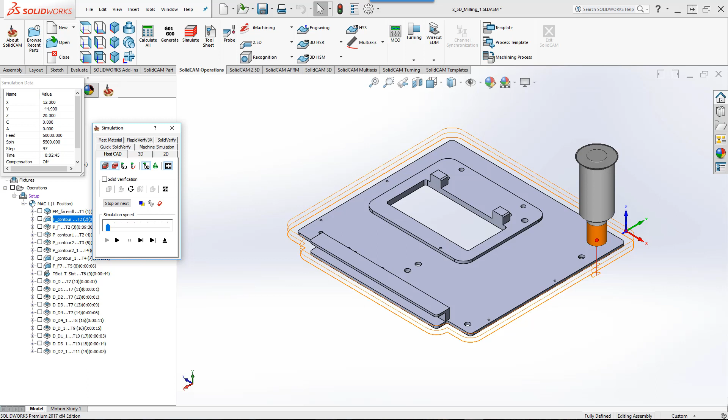Now the next operations will be dealing with pocket operations. The first one dealing with this area over here, having this as an open pocket on these sides over here, plus this area as an island. Whereas the second pocket will be dealing with this area where all the sides are open and these two nubs are a pocket. And the third one dealing with this area inside over here as a regular through pocket.

If we take a look at the first operation, for example, you'll see that our geometry has the outside chain as shown over here, where these are marked as open, and the second chain is the actual island. In this particular case, we'll be using a 16mm end mill. And if we go into our technology and go into the open pocket tab, we'll see that we'll be using a profile strategy to machine out that surface.

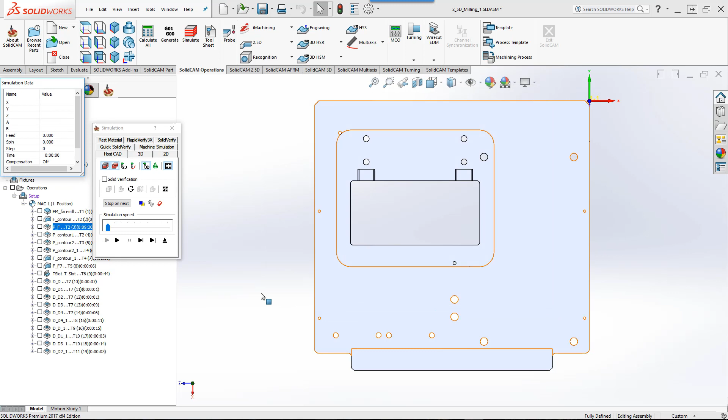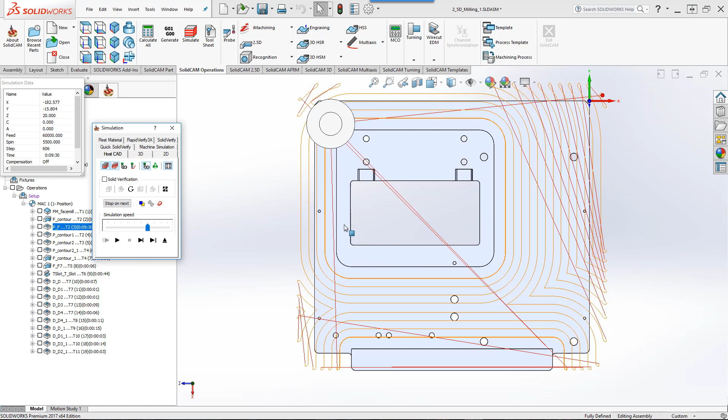Taking a quick look at the simulation, you'll see that the tool will be working around on the part itself using a profile strategy to clear off the entire area. A pocket operation with a profile strategy to machine out the part and working around the island over here. The same was done for this pocket over here, as shown in the tool path on the top of the part.

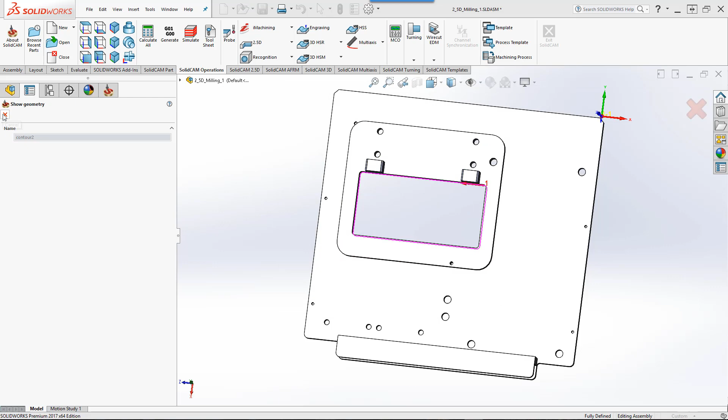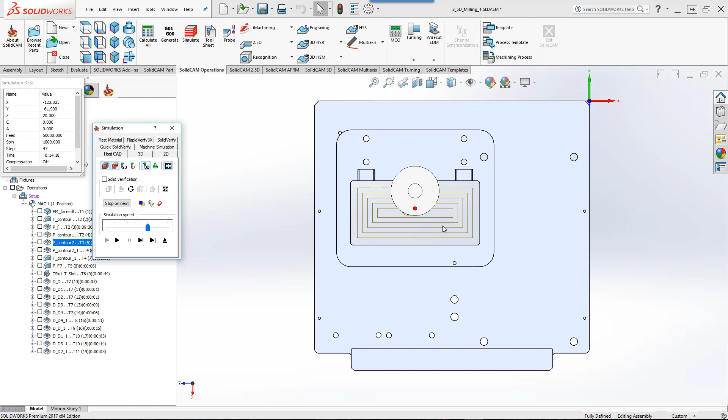And if we go into our next operation, you'll see that we'll be working on this inside area over there, inside that through pocket. This time, however, we'll be using a 10 millimeter end mill. In our technology, since this is a regular closed pocket, we'll just be doing a contour of that pocket. Taking a look at the simulation, you'll see that it does a contour operation inside over here, clearing out the inside pocket through the part itself.

Also, if we take a look again at the simulation, you'll see that the tool path that we have is going down with a helical ramping into the material.

Now, in the next two operations, we would like to clear out these smaller corners over here, these areas around here, since the previous tool that worked over there was not able to get into the corners because the tool was too large. So if we take a look at the first one of those operations, you'll see that we'll be using the exact same geometry we used in the pocket operation to clear this out. And we'll be using a smaller end mill, a 3 millimeter end mill.

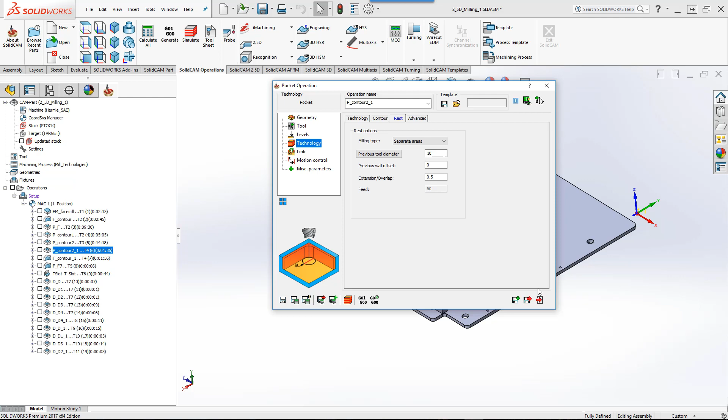So if we go into our technology area, we've used the option of rest. Now in rest material, we've used separate areas, and we've also told it what was the previous diameter being used in that area. So therefore, it will only work in the areas where the 10 millimeter end mill was not able to clean out. If we just take a look at the simulation, you'll see that the tool path will only clear out in this area. And if we take a look at the next one as well, you'll see that this one worked in these areas around here as well.

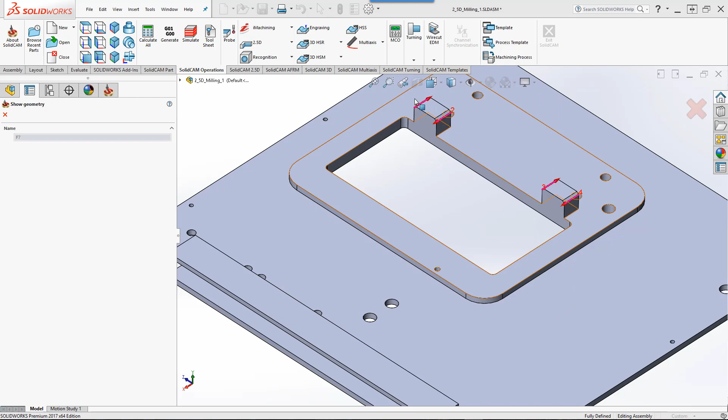Now, in the next operation, I'd like to work on the chamfers that we have on top of these studs. So if I were to go into my profile operation, you can see that the geometry are those edges on top over there. And the tool that I will be using will be an 8 millimeter chamfer drill with a 90-degree angle. In my levels, I've told it that I wanted to do a profile depth of 1 millimeter, as that is the actual size of that particular chamfer.

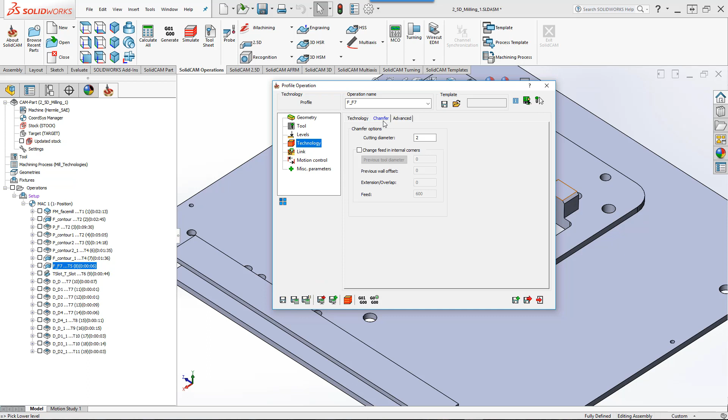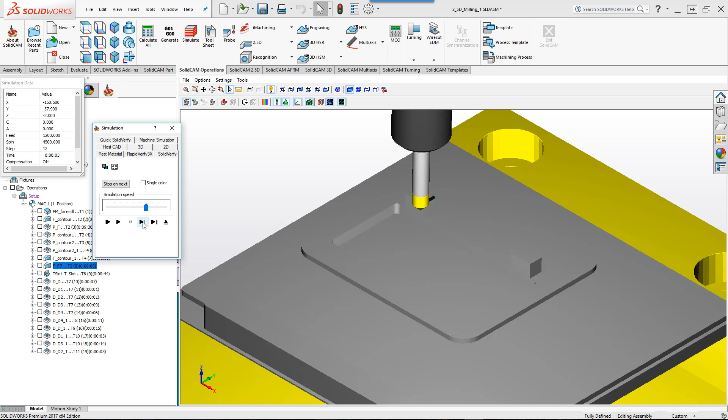If I go into my technology, we've used the option of chamfer. Now with chamfer, what I told it to do is to use the 2 millimeter diameter of that tool to create that chamfer. If we take a look at our simulation, and we'll do this using SolidVerify, you'll see that the tool will go down, create the chamfer on those edges, as well as on the stud in front of us to complete the part.

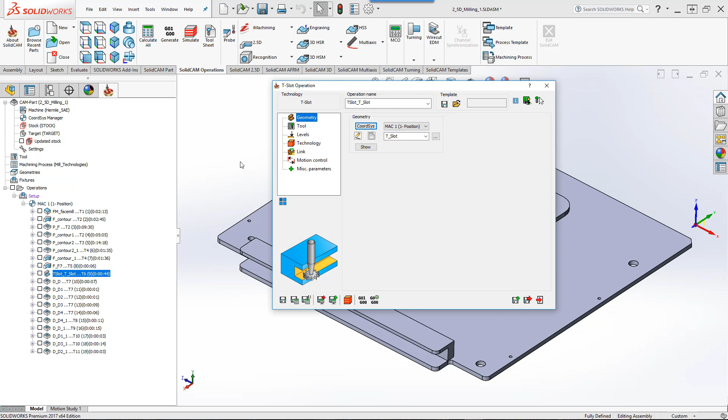In our next operation, I'd like to machine out this slot using a T-slot. So we use the T-slot operation, and if I were to go into the operation, you'll see that my geometry in this particular case is the wall line over here. The end mill that I will be using will be a slot mill with a 36 millimeter diameter and a cutting length of 3 millimeters. My levels will have the ceiling at -2, which is this area over here, whereas the depth will be this floor over here. Now let's go into our technology.

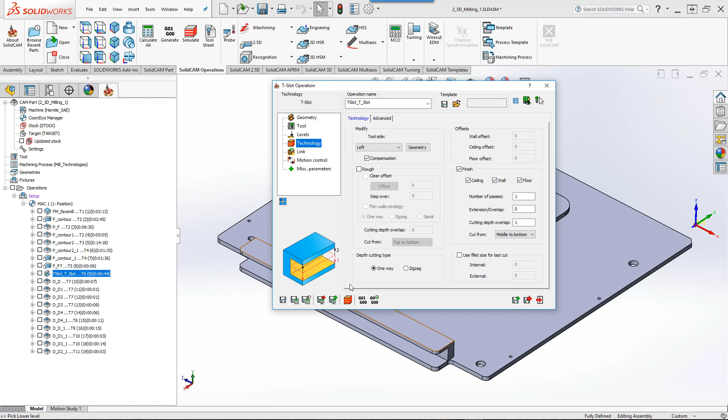In our technology area, we'll be doing a finish cut on the ceiling, wall, and floor, and we'll have an overlap between the passes of 1 millimeter. As far as cutting, we'll start from the middle of the slot, work our way down, and then work our way up. Let's take a look at the simulation, and you'll see that the tool will go in to the middle, keep on going down, and now start working up to the top of the part, completing that slotted area.

Now, the rest of the operations are all drilling operations. The first set of operations are spot drills to spot all of the different holes that are on the part itself with all the different sizes. And the rest of the operations are also drilling operations with a separate tool for each one of those with the proper size drill needed to drill out those holes.

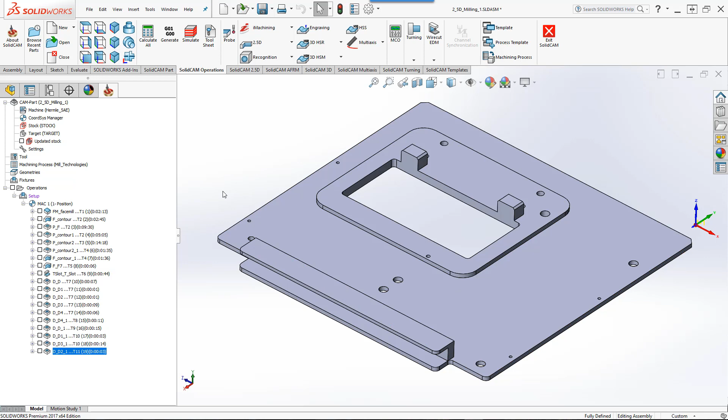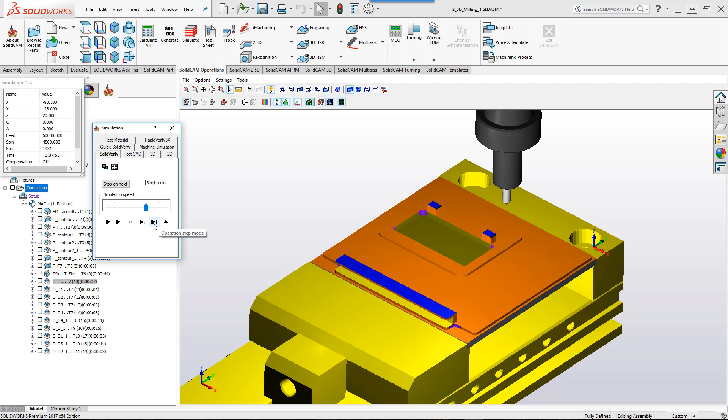Now, if we take a look at the simulation on the entire part, you'll see that we first do the face mill operation, then the profile on the outside, then the first pocket with the open sides with this area as an island. The next area is this open pocket area with the two studs. The through pocket, finishing out the corners of those areas as well, putting on the chamfers and working on the T-slot, then doing the spot drills as well as all the drills to finish up the part.